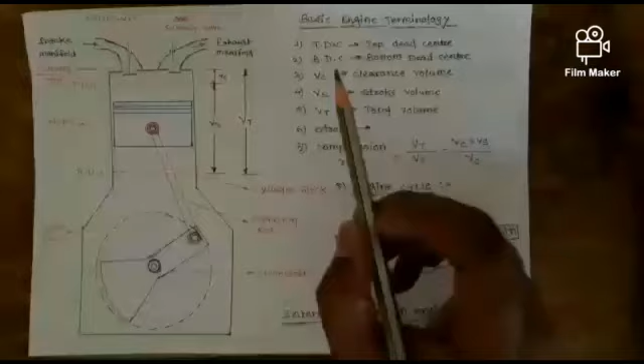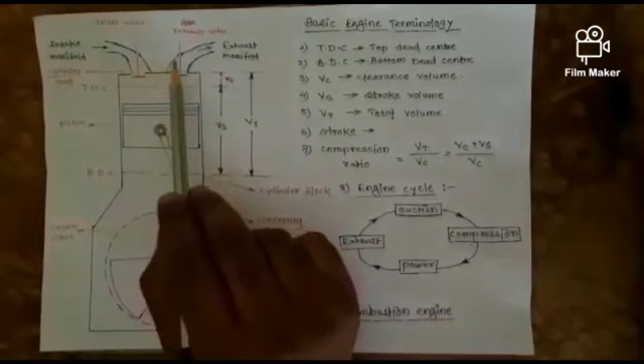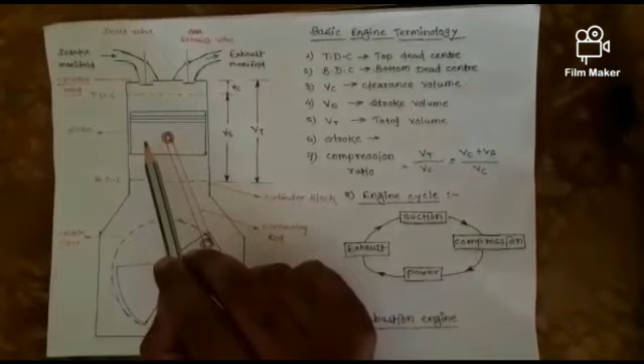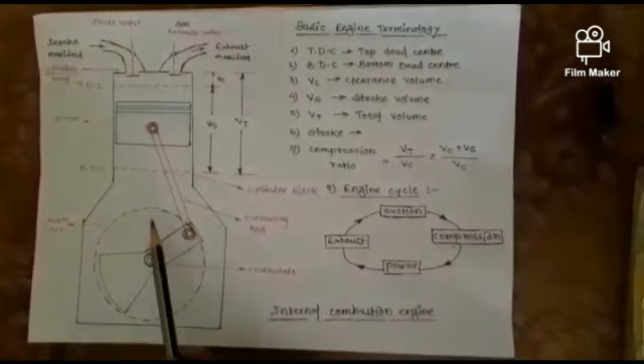This is a diagram of engine. An engine is made from three basic parts. First part is cylinder head. From TDC to the upward part of the engine is called the cylinder head, and in the cylinder head the inlet valve, exhaust valve, inlet manifold and exhaust manifold are mounted. The second part is cylinder block. In the cylinder block, cylinders are present for reciprocating the piston. The third part is crankcase. Crankcase is the part where the crankshaft is rotated.

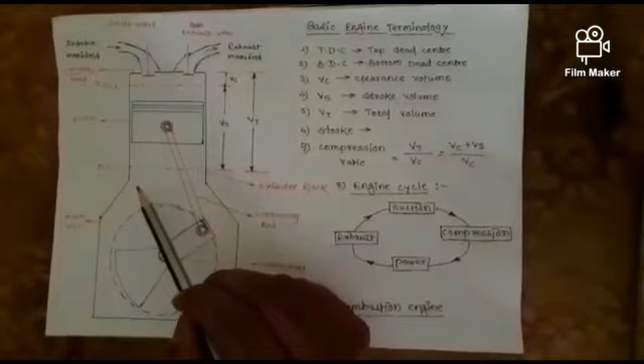The cylinder block has two main types. One is the monoblock and second is the split block. Monoblock means the cylinders and crankcase are arranged combined. They are not split from each other. Split block means the cylinder and crankcase are split easily, meaning they are separated from each other easily.

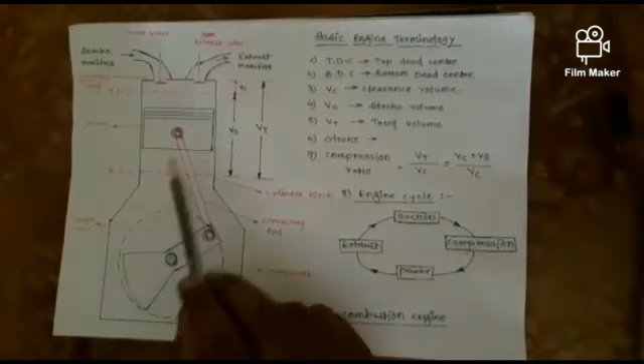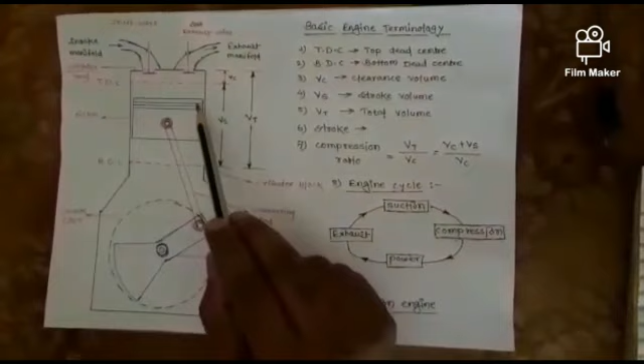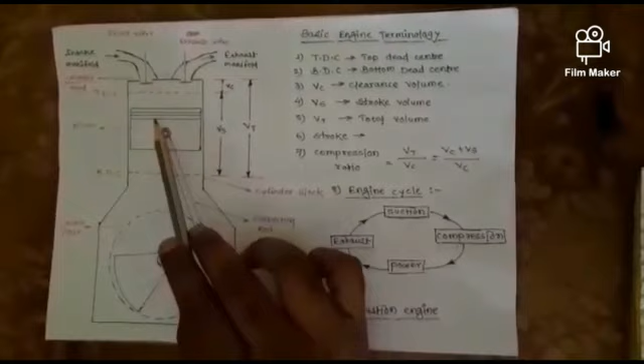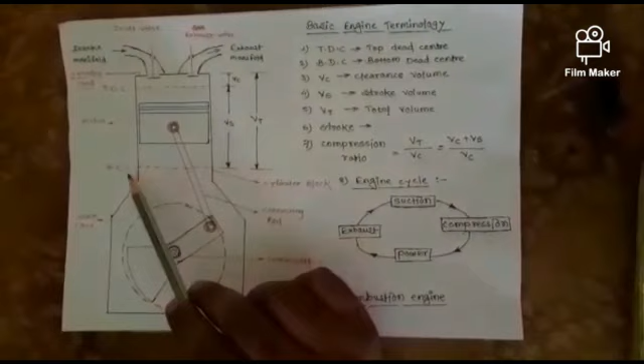Then we go to the basic terminology of engine. First point is TDC. TDC means top dead center. TDC is defined as the maximum limit of travel of the piston head towards the upward direction. Then BDC. BDC means bottom dead center and is defined as the maximum limit of piston head travel towards the downward direction.

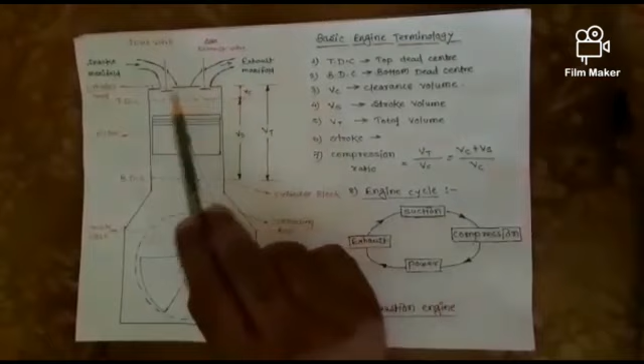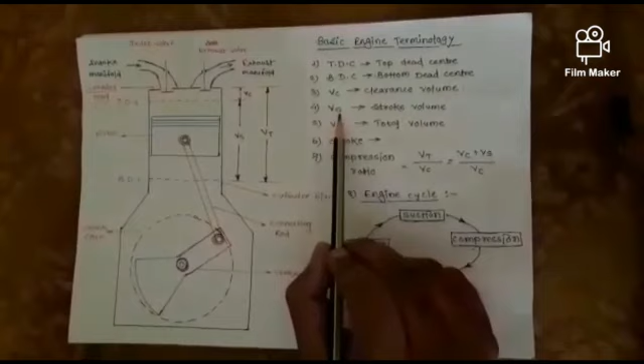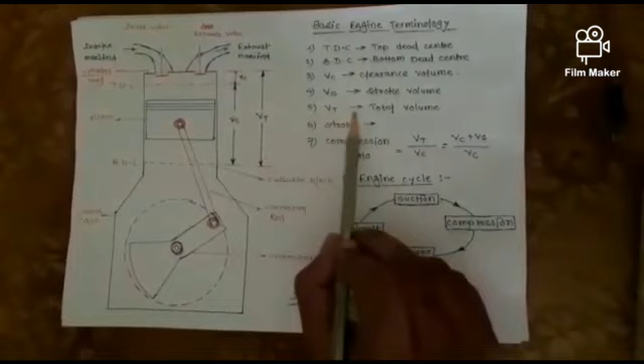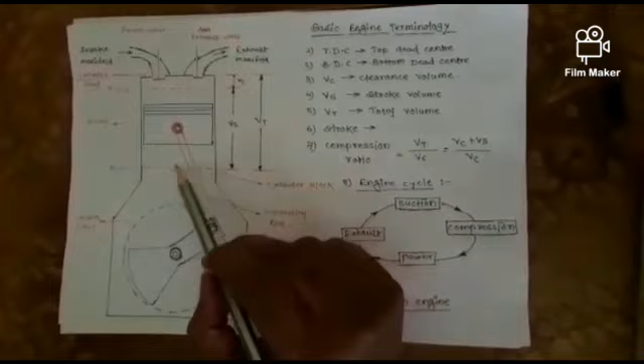The next terminology is clearance volume. VC means clearance volume. Clearance volume is the volume of cylinder from TDC to cylinder head. Then stroke volume. Stroke volume is the volume of cylinder where the piston reciprocates, meaning the volume from TDC to BDC. Then VT means total volume. Total volume is the addition of clearance volume and stroke volume, meaning from BDC up to the cylinder head.

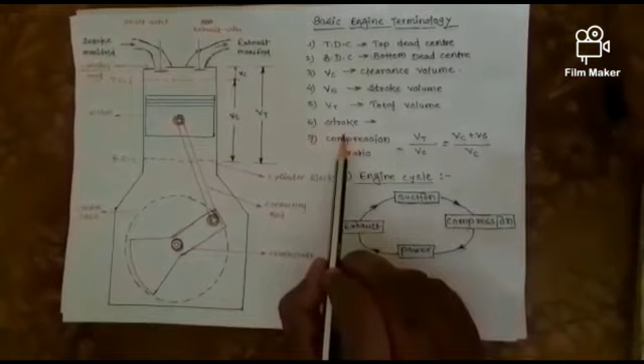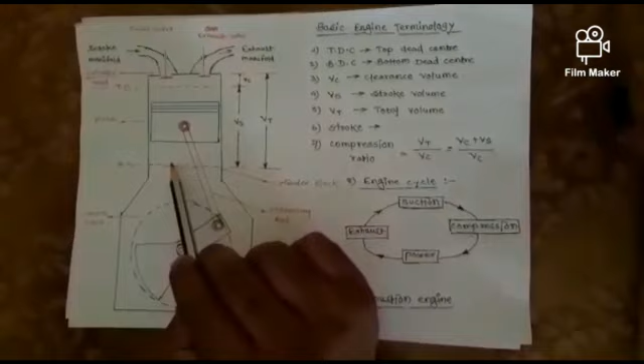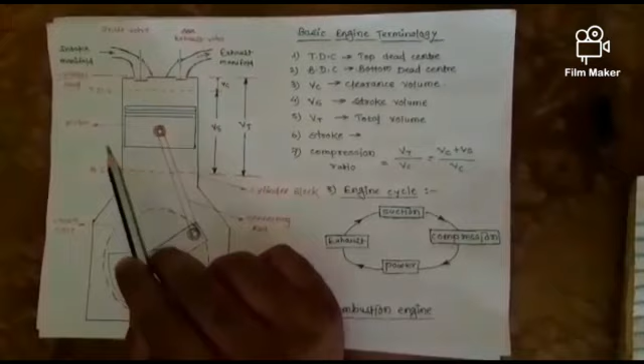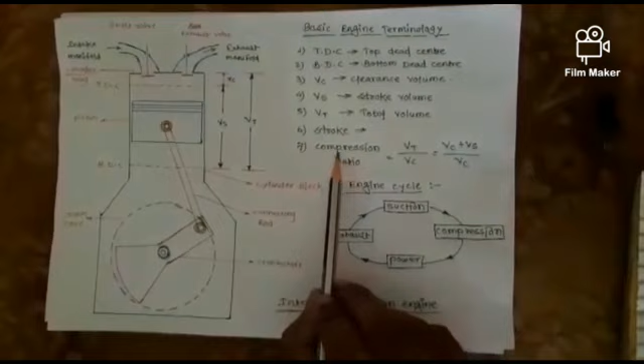Then stroke. Stroke means the traveling distance between TDC to BDC or BDC to TDC. When a piston travels from TDC to BDC, it is one stroke or first stroke. Then when the piston head travels from BDC to TDC, it is the second stroke. The seventh is the compression ratio. Compression ratio is the ratio of total volume to the clearance volume, and compression ratio has no unit.

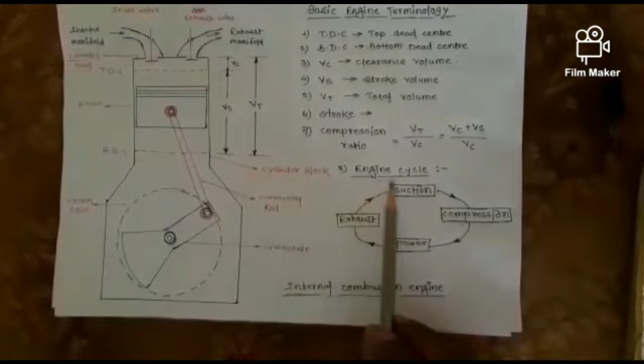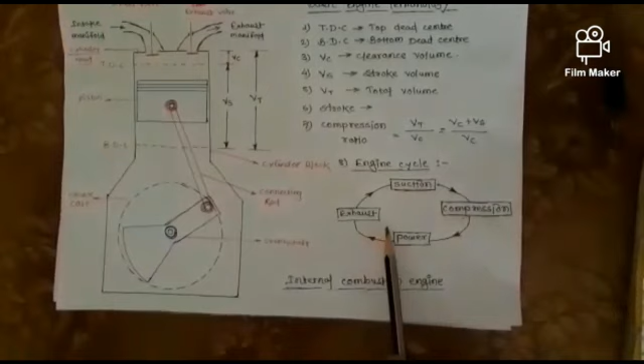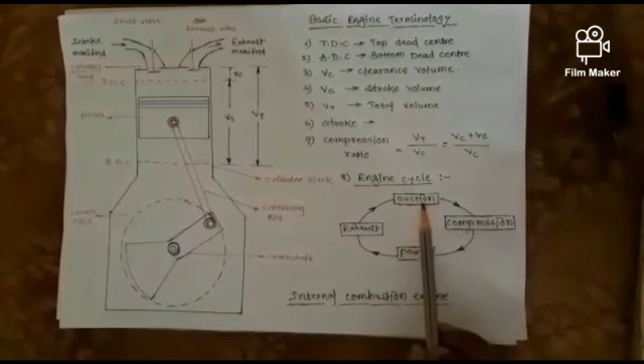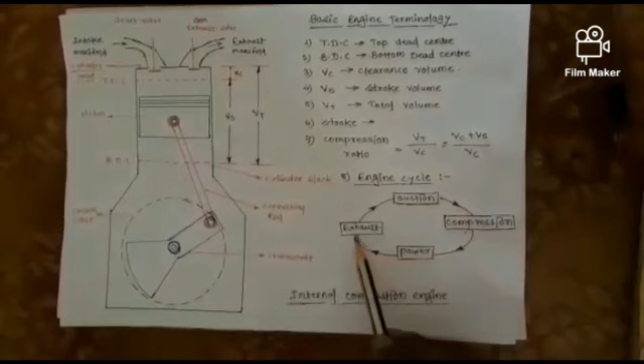Then last one is engine cycle. Engine cycle is where suction, compression, power and exhaust, four actions, take place continuously. First suction, second compression, third power, then exhaust. After exhaust, suction is repeated again, then compression, then power, then exhaust. Engine cycle is the repeating action of suction, compression, power and exhaust.

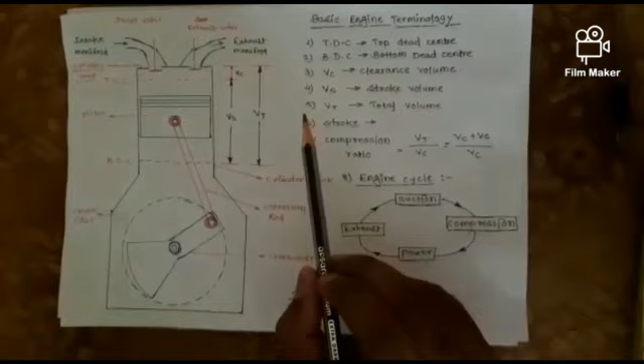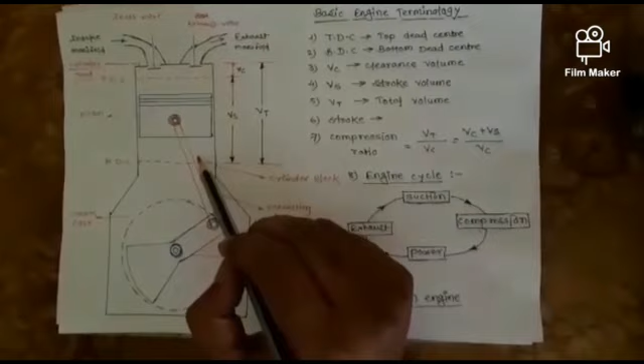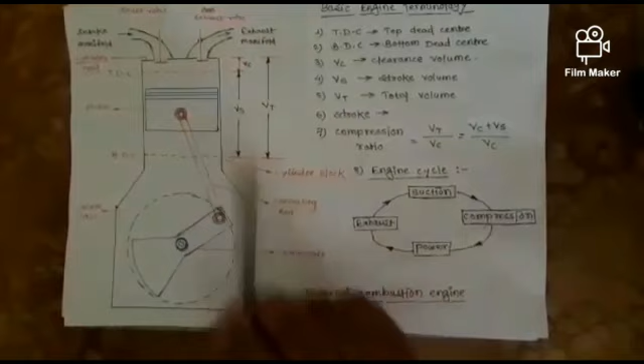Then we can define two-stroke engine and four-stroke engine. A two-stroke engine is the engine in which the engine cycle is completed in two strokes of the piston or one revolution of the crankshaft. A four-stroke engine is the engine in which the engine cycle is completed in four strokes or two revolutions of the crankshaft. This is all about the engine terminology.